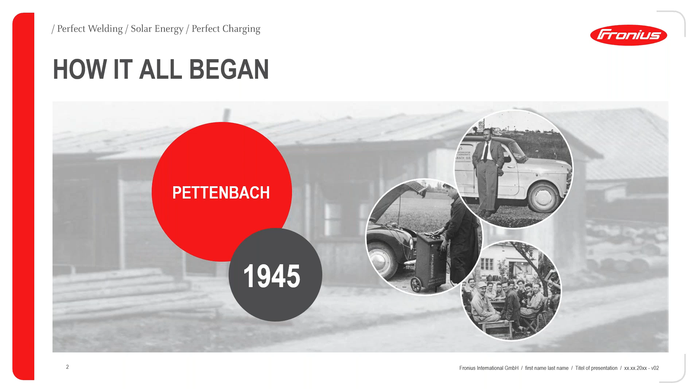As Matt said, we've been around since 1945. Fronius started in Austria. Speaking more locally, we've been in Canada since 2007, and the business unit Solar Energy was established in 2010 in Canada. We're Canadian, we're locally diversified because we've got both the welding and solar business units in Canada. We've got over 40 Canadian jobs and growing on a regular basis. So we're diversified locally, we're bankable locally, we're invested in the local economy, and we've been around to honor our warranties from within Canada since 2007.

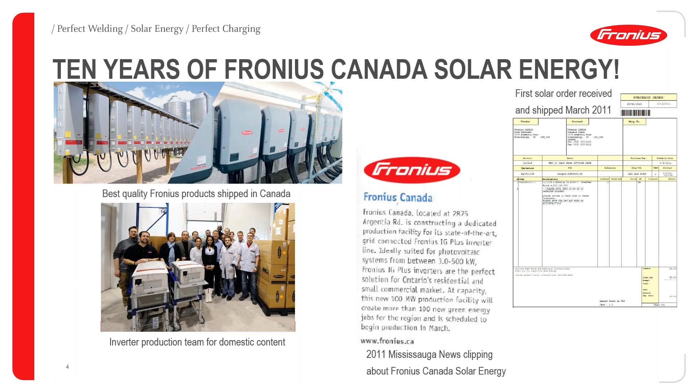Like I said, Fronius Canada's had solar around since 2011, so it's technically 11 years now, to be 12 years soon. And in that time, we had our production team locally here to do domestic content requirements for the FIT program in Ontario, and we've stayed here ever since, working on developing the business unit in Canada.

As was alluded to, our technical support is also located in Canada, so we understand the local climate that you are dealing with, the local challenges that you have with inspectors and all those kinds of things, and we're doing our best to support you from a Canadian perspective. Our tech support team is focused exclusively on Canada, so we're not distracted by US or European or any other technical calls. We're here to support your needs as you need us.

One thing that makes us really unique is that we're responsive on multiple platforms, so you can text us, you can call us, you can email us, and we will be responsive to the best of our ability. We will also check and respond to voicemails multiple times a day.

And the coolest thing is, if you've got a challenging issue that you want to get resolved right away, say your project location is 4+ hours away, or you've got a very important challenge that needs to be resolved, you can book appointments with our tech support team. So give them a heads up, let them know that you're going to be on site on this day at this time, and they will call you at the number that you specify at that time to make sure that you're getting what you need when you need it, when there's an urgent request.

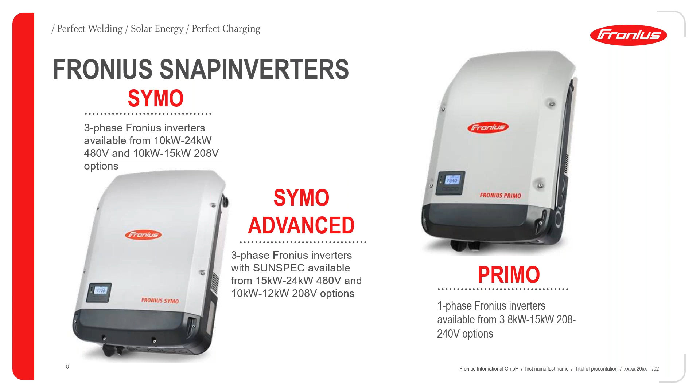And so it can be installed outdoors, 0 to 90 degrees, so it can be laid down flat or installed up vertically. And the great thing about this is it's rated out of the box to -40 degrees Celsius. So no matter how remote your projects are in Canada, the Fronius inverter is the best solution for you. It will work very well no matter what the external temperature.

And so as an example of that, we've got a number of projects in Yukon, Northwest Territories, and Nunavut. Some are even, I think, within the Arctic Circle or a few kilometers away from the Arctic Circle. And they give, in many times of the year, better PV production than projects in Southern Ontario or in other parts of the country.

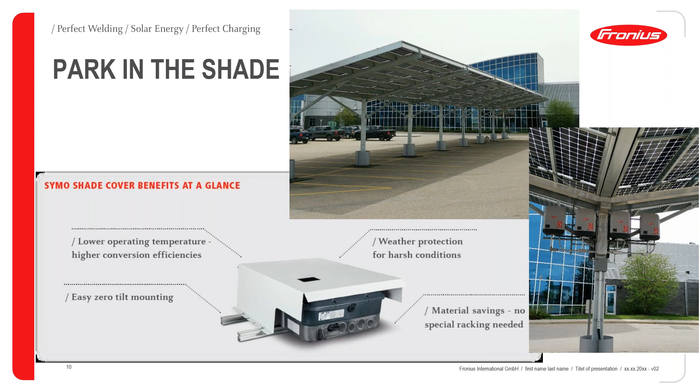Like I said, the inverters can be installed outside, but we always recommend parking it or installing it in the shade. And that's because it's power electronics, and the only thing that will live a longer, healthier life in the sun is basically water and trees. Nothing else likes to be in the sun. So the example I always give is if you can choose to park your car in the garage or in the driveway, what would be your choice? And the answer is always in the garage. And so that goes the same for any power electronics, whether it's an inverter or anything else.

One thing that comes up a lot with our inverters is how can we reduce yield losses caused by shading? And so we have just the answer for you. First, we'll go into basically max power point tracking. For those of you who don't know what that is, it's basically just tracking the production curve to maximize the output in kilowatts of the inverter.

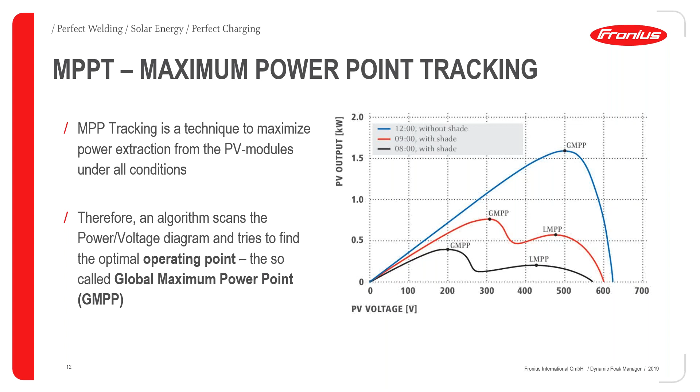But when you're looking at a local max power point tracker, which is what most inverters have, you can get caught on the local max power point and not actually track the global max power point when there's a shade going by or something. And so what the global max power point tracker does is it sweeps the entire production curve to find the global max power point to get the maximum PV output possible out of the array. And so we can enable this in our inverters with the Dynamic Peak Manager.

So you can see here as the shade goes by on the module, very slowly, the production goes down in kilowatts. And then the production will increase. So what it's basically doing is mitigating shading issues by providing more potential power coming out of the array. And so any issues that you have with shading are basically entirely removed with the enablement of the Dynamic Peak Manager. It's already inside all of the inverters that we sell, so there should be no issues with that. You just need to enable it.

Quick questions here. Sure, go ahead. One here from John. How long does the calculation take over LMPP? If you're talking about looking at the global max power point, I believe it sweeps the production curve every 3 minutes to ensure that it's on the max power point possible. Okay, and it says, I assume it takes more time to track the whole production values.

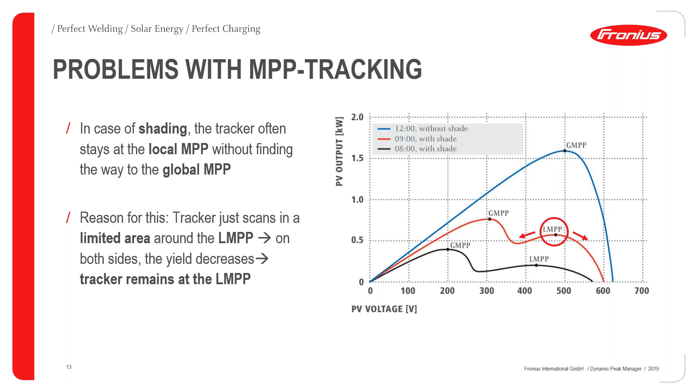I'm not sure I follow the context of the question, but... Sure, we'll follow up with you, John, after. Yeah, sure. I'm happy to have a conversation about that. Okay, thanks.

So another point is, even for an optimized panel, if there's shade sitting on it, then you're going to get the same production as if it was a string inverter. The only difference is once the shade starts to leave, that's when the optimizer starts to take effect. Because anyone with any experience in solar knows that shading doesn't actually kill an entire string. And that's because there are bypass diodes on the module, and the bypass diodes will cut out the strings that are underperforming. And so that work is actually done by the module itself through the bypass diodes, and no work is needed from an optimizer or an inverter.

The actual effect is after the shade sweeps through, so like a transient shadow like that chimney example, once the shade is gone, how does the system recover from the shaded scenario to make sure it's optimizing the production of the module? And that's what the dynamic peak manager is doing, looking at the potential production once every 3 minutes to make sure that it's got the maximum power production out of the module.

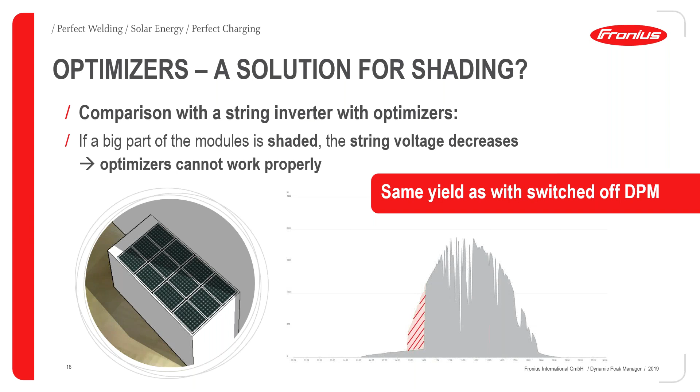Like I said, the temperature range for Canadian climates operates down to -40 out of the box. And it also operates up to 60 degrees Celsius on the high temperature side. And if any of you have been in Canada like me this past summer, we're getting mid 30s and high 30s on a more regular basis, unfortunately, and that trend is not going to slow down over the coming years.

So the reason we're able to perform in high temperature situations is because of the fans inside the inverter. The fans drive cooling within the inverter and radiate the heat and convect the heat through fins on the back of the inverter. And so you'll get the best cold temperature and hot temperature performance out of Fronius, where we will start to derate at much higher temperatures than any of our competitors.

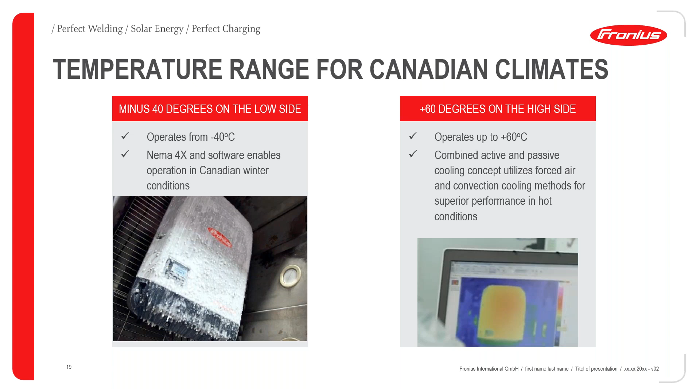And so in order to replace the inverter in case of a failure, all you need to do is throw the DC disconnect in the off position, loosen or remove 6 screws, pop the power stage off, pop the replacement power stage back on, 6 screws back in, DC disconnect in the on position, and the system's back online. So it is by far the fastest and easiest inverter to service and replace of any in the industry.

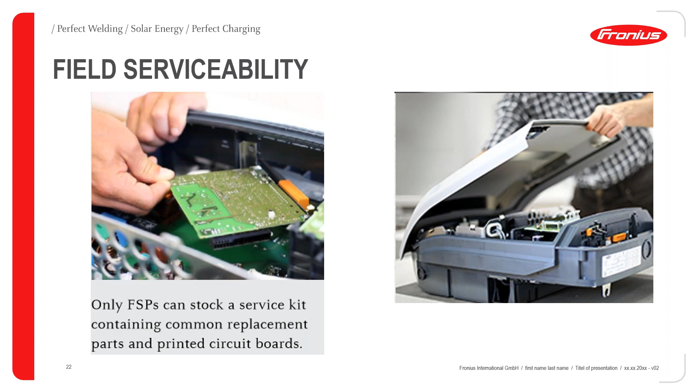The inverters are actually also field serviceable. All the boards on the inverter are connected mechanically. They're not soldered or permanently fastened. And so when people are called to do a service call, they can look at the components to see which have failed and then replace the boards, the PCBs in the field, which hold the failed component. So the service is even faster and easier than replacing the power stage.

The people who are able to do the field replacement of the boards are called FSPs, or Fronius Service Providers. They get 3 days of intense training where they basically break down the inverters to the bones and build them back up again, and walk through all the potential failure modes for the inverters. So they understand all the different failure cases, how they happen, and they learn how to identify them. And they also purchase spare parts kits.

So if they're called to the field to do service, they can identify the potential failure on the inverter, replace the board that's failed with one out of their spare parts kits, and get the inverter back online without a second truck roll, without getting a power stage to replace the existing one. So within one truck roll, they can do the entire service call and get the system back online right away.

We have a number of FSPs in Ontario. We have FSPs in Saskatchewan, in Manitoba, and in Alberta, with more being trained hopefully soon in Alberta, Saskatchewan, British Columbia, Quebec, and Nova Scotia. So the FSP program is going nationwide. We're hoping to get as many as makes sense to make sure that our portfolio of inverters is properly serviced and supported with properly trained partners.

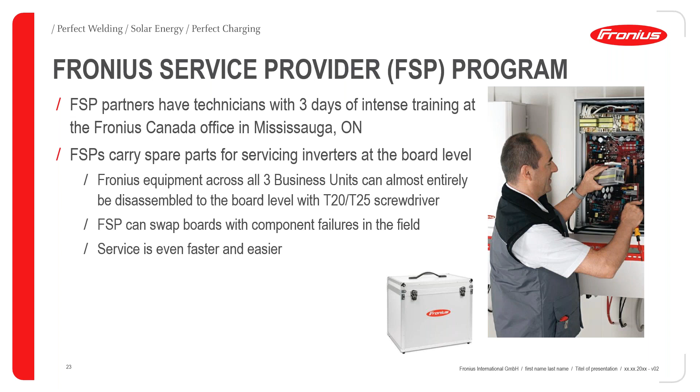We also have a rapid shutdown box, Duo and Quattro. This is especially relevant for single phase, primarily residential installations, where this will be low profile and can be mounted close to the array or under the modules.

And it can do 2 strings in, 1 string out for the Duo, and the Quattro can take 2 to 4 strings in and 2 outputs. So if you want to use the 2 max power point trackers on the inverter, you would go with the Quattro and either do 2 strings in, 2 strings out, or 4 strings in, 2 strings out. And this is for 600 volts shutdown.

The great thing about this product is it doubles as a combiner box. So it actually ends up being a net cost savings when using this product instead of getting a separate rapid shutdown solution and a separate combiner box.

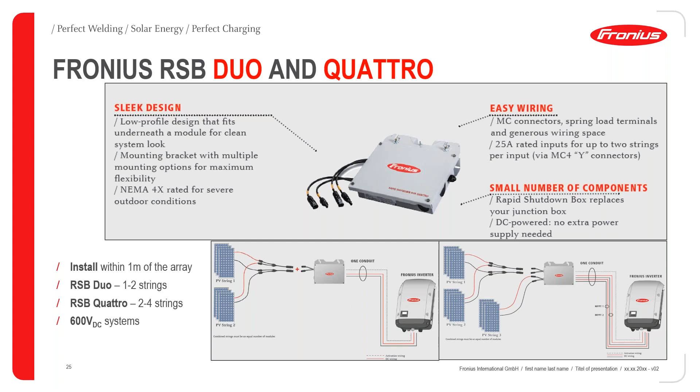We have 3 free monitoring platforms. We have Fronius SolarWeb, which we'll review at the end of this presentation, Fronius Solar TV, and the SolarWeb app. So Solar TV would be an example if you've got a high-profile customer, like a large retail customer, someone who wants to have a lobby display showing the production and performance of their array. With a smart TV, they can connect to solar.tv and connect it that way. And the SolarWeb app is basically a representation of SolarWeb, but for a smart device.

Fronius Monitoring. So monitoring is enabled via the Data Manager 2.0, which enables monitoring via LAN, wireless LAN, and Modbus options. It's a very simple communication setup using your laptop or smart device. And this enables all communication. One data manager is required per site. So if you've got one inverter or 100 inverters, you will only need one, up to a maximum of 100.

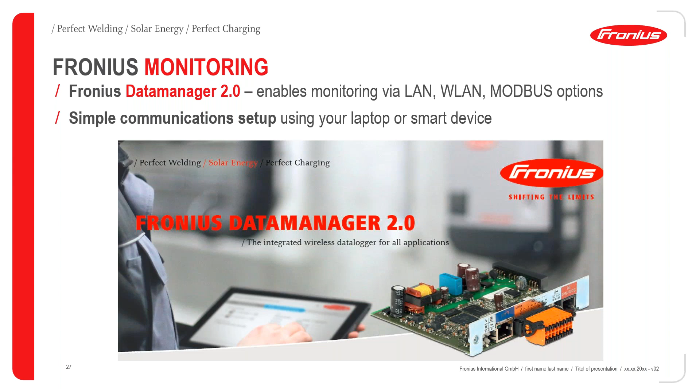Fronius Inverter Registration. This is a very important topic. So for anyone who's buying a Fronius inverter, we want to make sure you're getting the full 10-year warranty. And so when you register the inverter, the warranty starts from the date of installation, not the date of sale. For example, if BayWa buys a bunch of Fronius inverters and some of the last ones maybe sell 4, 5, 6 months from the date that they purchased the inverter, then by the time you get it installed on your site, it could be another couple of months, maybe even up to a year. So that's automatically 6 months to 1 year of the warranty which has been lost.

So when you register the inverter, what you're actually doing is informing us of the date of installation of the inverter with the registration process. And once the inverter is registered properly, then the warranty start date will be reset to the date of installation based on the registration. So that allows us to ensure you're getting the full 10-year warranty from the date of installation for the inverters that you install.

All the warranty information can be found on SolarWeb. You can print warranty certificates on there as well and look at the warranty status to make sure that it's been processed properly. It clarifies all ownership information when the inverter is registered, and it simplifies technical support because we can automatically identify the serial number of the inverter if it's been registered on the site.

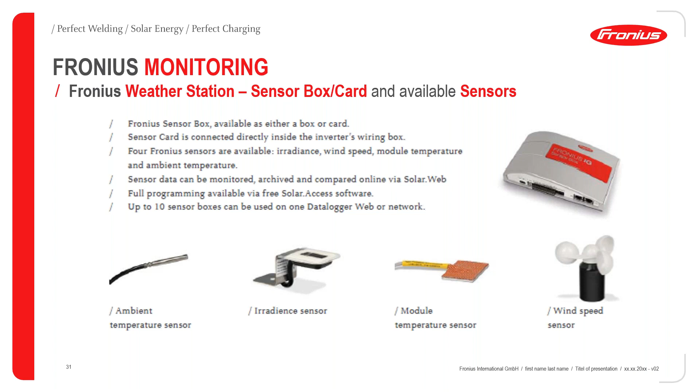We have monitoring options as well for a full weather station. So we have sensors for ambient temperature, irradiance, module temperature, and wind speed to allow you to get weather station data on your installation site.

We also have consumption monitoring via our smart meter. So the smart meter allows us to visualize the consumption and production of your system. And we'll go through the details of that when we look at SolarWeb. But all is to say, it's a small cost to add the smart meter, and it allows you to visualize the entire energy flow. So all the power that's being generated from the PV array, all the power that's being consumed at the home, all the power that's being pulled from the grid. So you can have a full energy flow diagram and really understand your energy as it's moving on your property, or your customer's property.

And so the real value in that, say for example, on a net metering system, you can double check to make sure that your numbers for generation and consumption match the numbers from the utility company, and make sure that you can really understand how the system is performing.

There's also the possibility for feed-in regulation and dynamic power reduction. So if there's a site with, for example, limited export or zero export, that can be managed through these. Those are usually more in-depth conversations with utility companies, but those are systems that we have installed in a number of systems across the country.

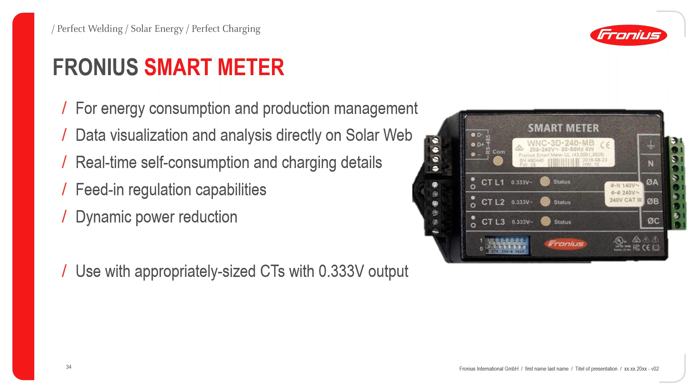We also have regular training, usually 2 per month. We have many that are pre-recorded webinars as well, and some that we can do on demand. The most common topics include installation, like best practices for installation, product training, commissioning, setting up communications, etc.

For anyone who's looking at potential retrofits, most commonly happening in Ontario right now, but there's a lot also happening outside of Ontario. A lot of warranties are expiring on manufacturers who are no longer in Canada or in the market. So we can help with some string design or system design in consideration of the inverter to make sure that if you're just replacing the inverters, you can replace with Fronius, and we'll make sure that the system makes sense and that you'll get the best performance and production out of it.

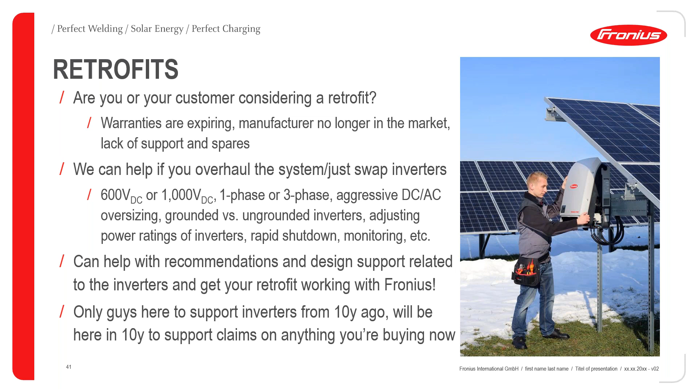We can help with recommendations and design support as well. We're here to support for any of your needs, retrofit or otherwise. We've also got the Solar Online Support tool. So what happens now, say for example, you're monitoring your system and you get an error code. You would look at the error code and then go to the inverter and say, okay, what do I do? I don't know. You've got to look in the manual for the error code and see what the process is. What you'll probably do is call tech support, and tech support will give you a step-by-step problem resolution process.

With the SOS tool, what you can do is put in the specifics of the inverter. So you put in the inverter itself and the serial number, and you would follow the same step-by-step process that you would get if calling tech support. So you don't have to wait. Maybe if tech support's not available or you're waiting for them to call you back, you can just open the SOS tool and go through the process.

The really great thing about this is if you can't resolve the issue with the SOS tool and you do need to still call tech support, the SOS tool automatically creates a case for us in our system and shows us the steps that you've already completed. And so there'll be a lot of time saved because we know exactly what you've done already. And so we won't ask you to go through those same steps, and we can shorten the process substantially and get you more effective time with our tech support team.

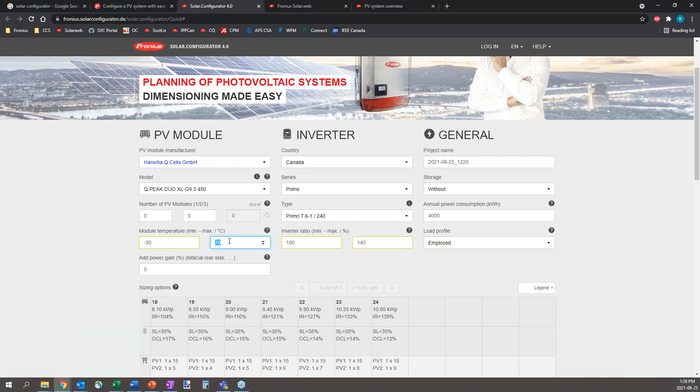And the module temperature minimum and maximum, I put -30, and then on the high side 70 degrees, because this is the module temperature, not ambient. And inverter ratio here, I put anywhere between 100 and 140, so that's the oversizing ratio. And then down here, you can see in this chart, it shows all of the different module counts. So say for example, let's choose 20 modules. That gives us a DC power of 9 kilowatts peak with an inverter oversizing ratio of 116%.

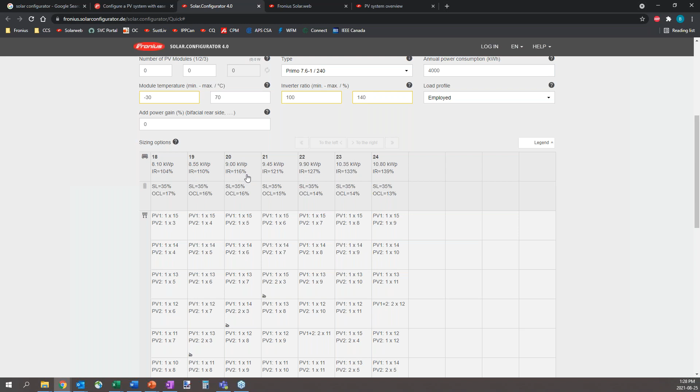So in this case, we can look at all of the different string configurations to get us to 20 modules. So if you know you can fit 20 modules on your customer's roof, then this is the column for you. If you can only fit 18 modules, this is the column for you. If you can't fit 18, well, you need to pick a different inverter.

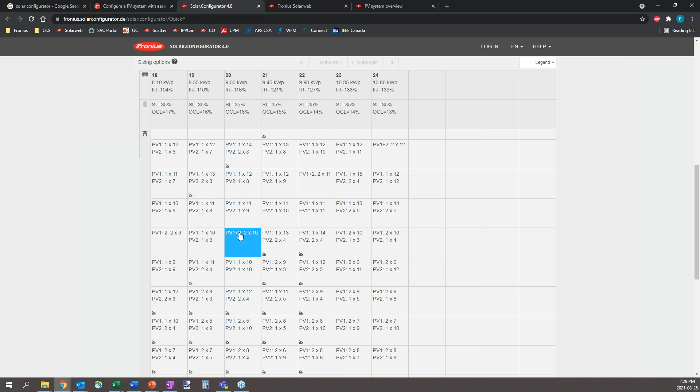And so if you want to fit, let's say 20, it's a nice round number. So your options are you could do one string of 15 and one string of 5, or a 14 and a 6. Or if you want symmetrical strings, you could do 2 strings of 10. So you have all the different options available here to you. So let's assume we have a smaller roof section and a larger roof section, so we'll do a string of 14 and a string of 6.

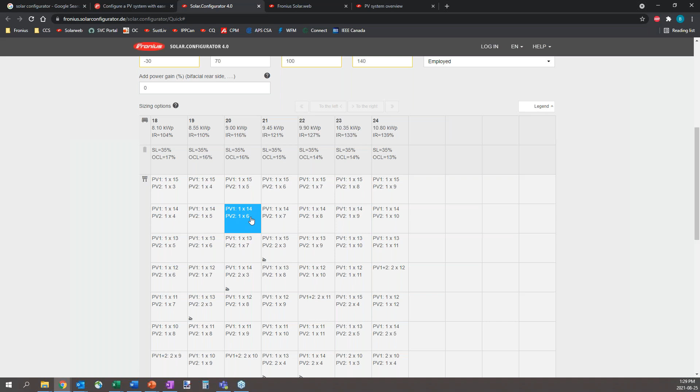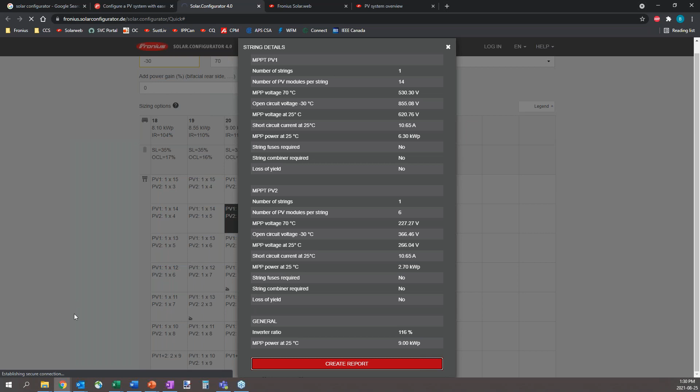So you can see here, if you click on that square, it'll take us to the summary showing the string details. So the per MPPT production voltage, current, everything is on that with the module specs in consideration. And then if you click on create report here at the bottom, it'll automatically generate a PDF report for you with all of the string details, including the module specs.

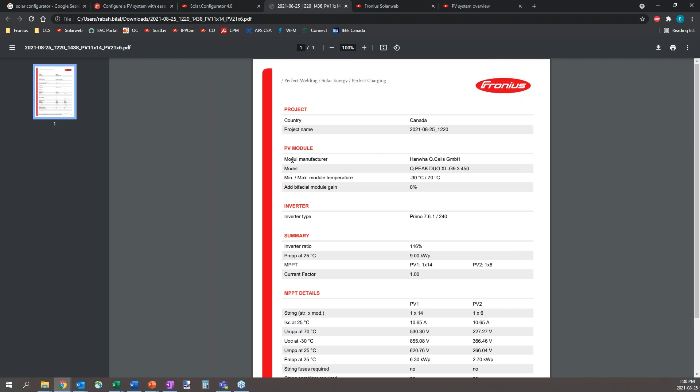So you can see here, you set the project name if you'd like, and it shows you the module model number and all those details, and then the summary here, and then the performance for each MPPT. So that took a total of 5 minutes, and I took my time explaining it. It's usually a lot faster than that, especially if you use the tool once or twice before. You get the hang of it, and you can do a string design in less than a minute, typically.

So that, I would say, is the first myth dispelled. Designing a PV system with a Fronius inverter is very easy and straightforward, and you even get a report to add to your files. Myth number 2: string inverters produce less kilowatt hours than module level power electronics like microinverters or optimizers. If you've got the microinverters or the optimizers, they're looking at individual module performance, and so you get better.

Okay, so there's a whole bunch of data, and you can just go on Google and look at a whole bunch more data, but ultimately, this is just not true. The only time that a Fronius inverter will be outperformed by optimizers or microinverters is when the array is covered by snow. So that'll be January and February, where you're getting the least yield anyway. Otherwise, typically the production on the PV array is matched or exceeded by Fronius, and the total kilowatt hours generated in a year will be greater with a Fronius inverter than with microinverters or optimizers.

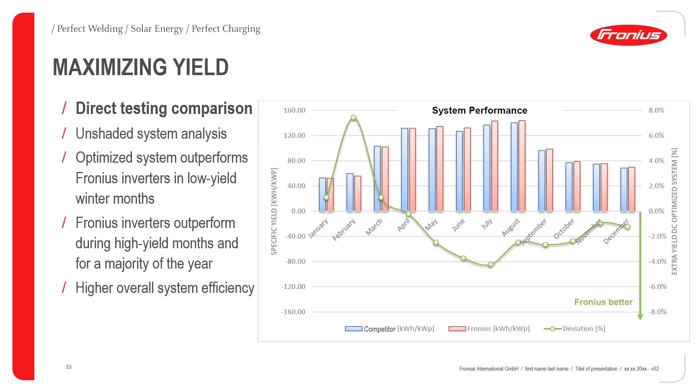Module level power electronics are safer. That's the next myth. And so one thing I always like to point out is that if you look at global numbers for failures on PV systems, or for fires on PV systems, number 1 and number 2, usually equally relevant, are power electronics and inverters, and connectors and terminals and junction boxes. So anywhere where there's connections. Those are the two that usually add up to about 50% of the cause of fires globally on PV systems: connectors, terminals, junction boxes, and power electronics.

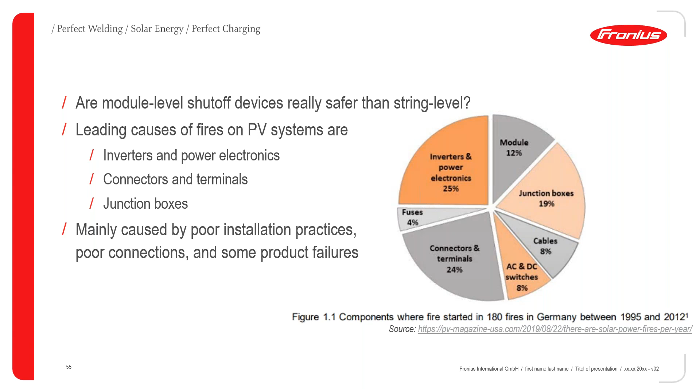And so you can automatically understand that if you've got optimizers or microinverters on the roof, you're increasing the quantity of power electronics by a wide margin. If you've got 1 optimizer per module or 1 microinverter for every 2 modules, for 20 modules, that's 10 to 20 additional components on the roof. Also, with module level power electronics, the number of connection points is at a minimum typically doubled, if not tripled, compared to a string inverter solution. So by trying to make the system safer, you're actually increasing the 2 leading factors of fires and failures on a PV system with the number of power electronics and the number of connections on the array.

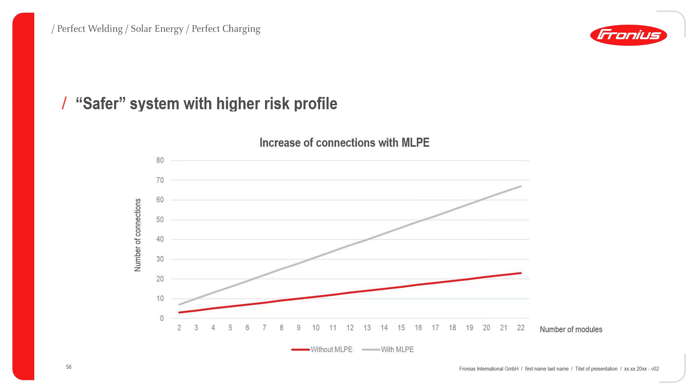One other myth that people believe is that they need module level monitoring to make sure the modules aren't failing and that they're working properly. And so again, anyone who's been in the industry longer than, I'd say, a year or 2 should know that modules are probably the last component to fail on a PV array. Maybe the racking lasts a bit longer, but the modules last forever. There's modules installed in the country since the 70s that are still outputting power. Maybe not 100% or 80%, but they're still in working condition.

If there are issues with the PV modules, and they're few and far between, usually they'll appear within the first months of installation, and they'll be irrelevant from there. So when you're putting a power electronic device to monitor the module, what you're actually doing is putting a device which is going to monitor itself. Because over the 20-year life of the system, any power electronics, whether string inverters, microinverters or optimizers, will fail at some point. And so you'll see probably at least 1 to 3 failures on the device itself before you would ever see any failure on a module. If there are failures, there's very easy processes to identify which string and then do a rule of halves to identify which modules are affected on the string.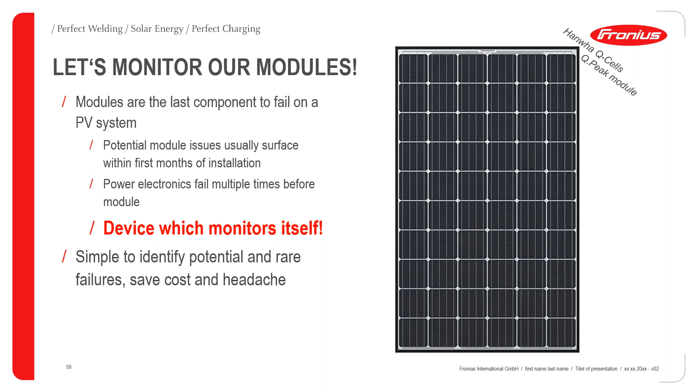So finally, how much does this really cost? Upfront, we know that microinverters and optimizer solutions are more expensive than string inverters. That's not in question. So the real question is, what about the long-term cost of ownership? If you're adding all of these components, you're adding all these points of failure.

And all things being equal, I never like to say anything bad about my competitors. They make great products. Assuming their failure rates are the exact same as Fronius's failure rates, they will eventually fail. All power electronics fail. An inverter or a microinverter or an optimizer is the same as your TV or your laptop or your cell phone. They will fail at some point. That's just the function of them. So whether you're buying a Fronius or anyone else, you probably will see a failure over the 20 years.

Now, that being said, we have a large number of inverters that have been operating in Canada for 10 plus years, even some that were purchased before Fronius Canada existed, that have not had a single failure. So whether it's 5, 10, or 20 years from the install, no power electronics will last forever.

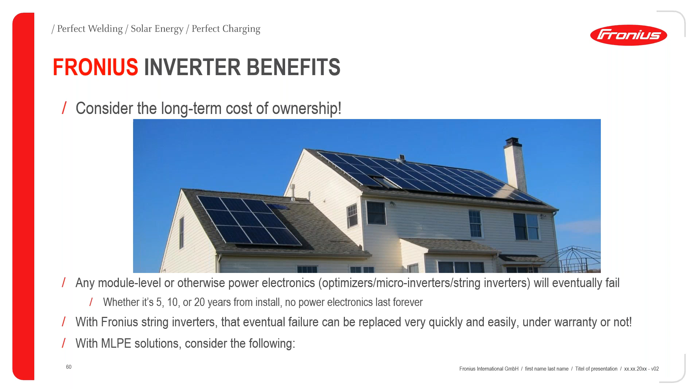That's the fundamental. So with Fronius string inverters, that eventual failure can be replaced very quickly and easily, whether it's under warranty or not. You can swap the power stage and get a new power stage to replace it, or get the components replaced by an FSP. And so these are the examples that I like to give if you've got microinverters or optimizers. If one unit goes down, your customer gets on the phone with you kicking and screaming, this inverter or this module is not producing, please get out here and fix it.

If I was sitting with you in the same room, I would ask you, how much do you think this service call would cost? Because I like to know from your experience. The answer typically is around $250 to $300, because you've got to get up on the roof with a ladder, remove 2 modules to replace that failed component and get the modules back on. Time consuming, you charge the customer, then you go on.

Whatever period of time later, this module fails. Well, now you can access it easier, but you still have to get up on the roof to get that failed point. And your customer is kicking and screaming, and you're saying, should I wait till more fail, or should I get out there and appease my customer? Eventually you get out there, another, let's say $200 to $250 for this truck roll that your customer is going to be paying for.

Pardon me, I'm just going to drink some water.

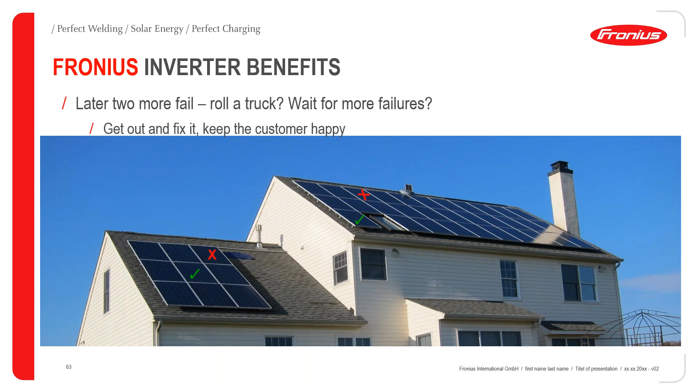Okay, so then these two fail. So now you've got 2 different roof surfaces. They're both relatively easy to access, but still it's a lot more time. You've got to get up on 2 separate roofs. So let's say this is $350 to $400. But your customer wants you to get out. You want to wait for more, but your customer doesn't want to wait. So that's more cost and pain for you and your customer. Then at one point this happens, because they don't all fail at the same time, unfortunately. They can pick and choose when they'd like to fail.

So think about, if a customer called you with this failure mode and asked you to come do a service call to replace them, how much would this actually cost? I usually get estimates around $1,000 to $1,200 on the conservative side, probably $900 to $1,200 cost to your customer. I know there are some free replacements and maybe a little bit of service reimbursement from my competitors, but I don't think it's enough to cover how much this is going to cost. Your customer is not going to be happy with the cost of this.

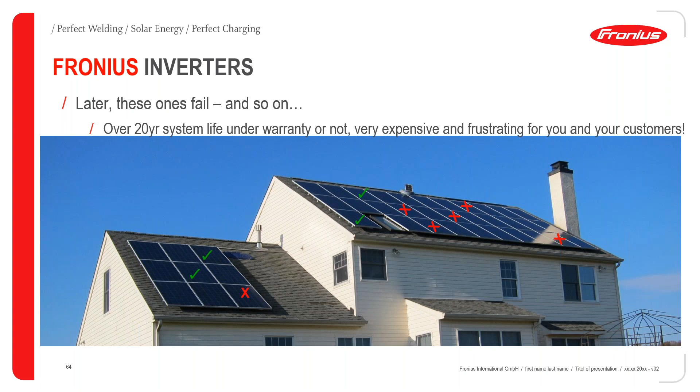And this is how unpredictable it is, right? You don't know if and when they'll fail, and if they do fail, how nice they'll be to you. So again, assuming Fronius fails in the exact same failure rate, maybe you get 1 or 2 failures over the 20-year life of the system. You walk up to the inverter on the side of the house or in the garage. You turn the DC disconnect, pop out 6 screws, replace the power stage with the new one, put the 6 screws back on, DC disconnect in the on position.

That's $150 to $200 service call for your customer, once, maybe twice over the 20-year life of the system. Then you have a better reputation or relationship with your customer. You get word of mouth references from them for their neighbors and friends who want to do solar, and you have a better general reputation with that.

So if you consider the long-term cost of ownership, lower cost for O&M, lower cost upfront, local tech support in Canada, the SOS tool, the Fronius service providers across the country, install, service, warranty claims are all streamlined and all simplified and all honored through your Canadian Fronius partner. The warranty product is not coming from the US or from Europe or from China or from Mexico. It's inventoried here in Canada to support your needs.

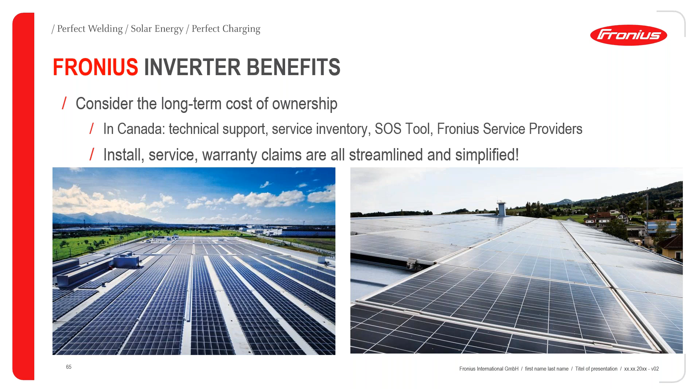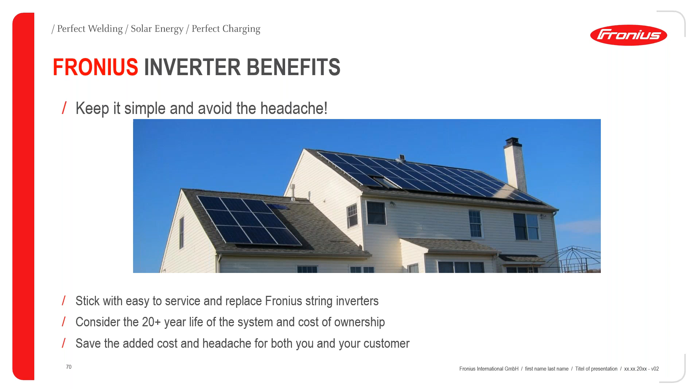So swap the inverter quickly and easily. You've got all of these great benefits with Fronius. Keep it simple and avoid the headaches. Stick with the easy to replace inverters and keep yourself happy, keep your business happy, keep your customers happy.

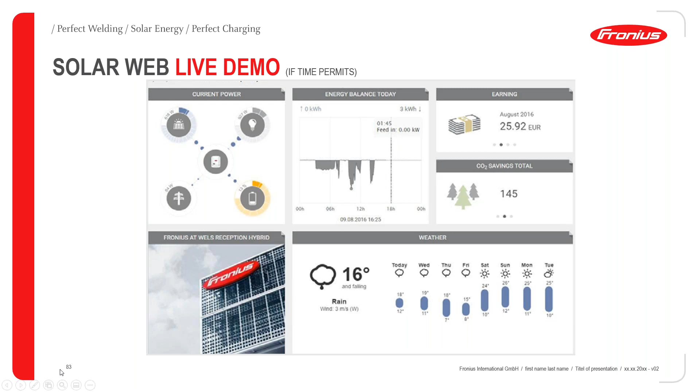So I'll jump to the SolarWeb live demo now. And then that's pretty much it. So I'm definitely open to any questions that you've got at this point while we look at SolarWeb. And so SolarWeb is the monitoring platform for Fronius, and it's free. And so if you'd like to show it to your customers to help them understand the capabilities, you can go to solarweb.com like this, and then click on View Demo.

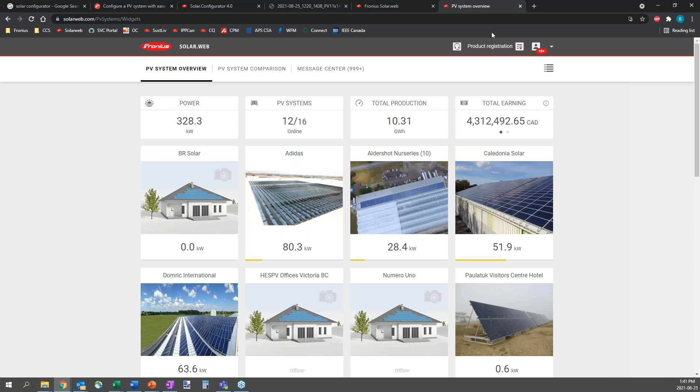Oh, I think because I'm logged in, it won't let me. But there's a number of demo sites on SolarWeb where you can look at what the system looks like. If you look at the Madrid site in particular in Spain, it'll show you what we're going to look at. So I like to show two examples. The first example I'll show is Caledonia Solar.

So this is SolarWeb with a Fronius inverter and a data manager. So here you've got the current power. You can see here is basically 52 kilowatts, which is 52% utilization. Obviously, that means that this is a 100 kilowatt system. Energy balance today, we've gotten 141 kilowatt hours off of this system. I want you also to pay attention to this current power diagram. Basically it just shows the inverter, it shows the percent utilization, and of course the dark yellow area is the percentage and kilowatts being produced at the moment.

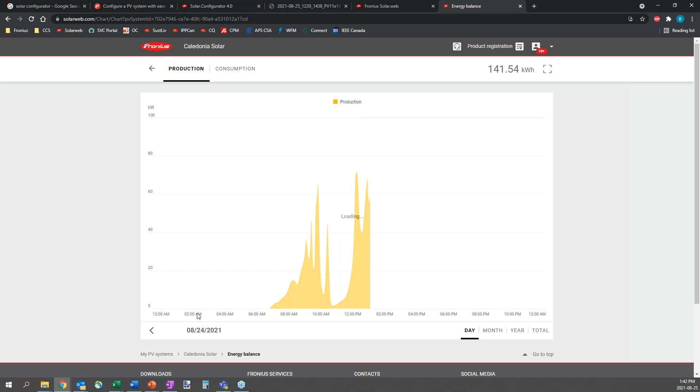So if we look at energy balance today and click on the words at the top, we can look at historic data. So we can see here, this is the PV production for the day. We can go back to yesterday to see what it was like. And obviously that was a beautiful production day for Caledonia Solar.

Started right in the morning. Apparently it's oversized nicely, so you're going to get nice early production of PV, and then you're going to cap out at around 11:30, and it's going to be max production until somewhere around 4 o'clock, and then it starts to ramp down as the sun goes down, and then the production is done. That's a great example of a simple SolarWeb site with the data manager and the inverter registered on there. And you can see here for yesterday, 858 kilowatt hours were produced.

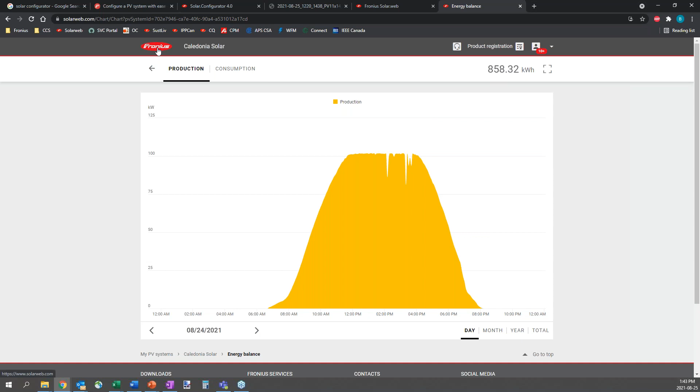Now, if we go back to the main page on SolarWeb, let's look at another site here called Johnson Solar in Manitoba. So now you can see here under current power, we're no longer seeing just the PV inverter. Now we're seeing the entire energy flow diagram. And that's because Johnson Solar has a smart meter installed.

And what the smart meter is doing is feeding the data manager all of the consumption data off of the main service panel. So the smart meter is connected with CTs to the main service panel and measures the current coming off of the main service line into your service panel on the residential installation or commercial installation. It works for commercial systems as well. And so now you can look at the net data between the PV generation and the energy consumption of the property to understand all of the energy as it's flowing to and from the property.

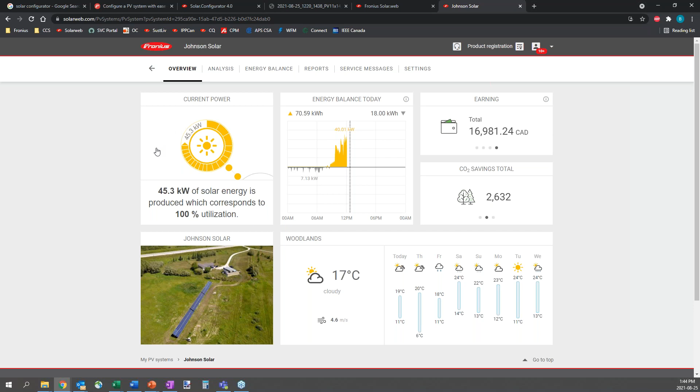So here in this case, this customer has a very aggressive net metering contract, and so he has a very oversized system. So it is a 45 kilowatt system, which is three 15 kilowatt inverters on these three sections of the array. And so 45 kilowatts is currently being produced. It's a very sunny day at the moment in Manitoba, and so he's getting 100% generation of the array.

The system is 100% self-sufficient because it is being serviced completely by the PV generation at the moment. The property is currently consuming 6.52 kilowatts, which is supplied entirely by your PV production. And so the net, which is 38.8 kilowatts, is currently being fed back to the grid, where he's being paid on his net metering contract.

So if you look here now, you can see the chart is even different because now you have a gray area below the zero line, which is showing the consumption. So this chart is now a net chart of generation and consumption, as opposed to just showing you the simple generation off of the array.

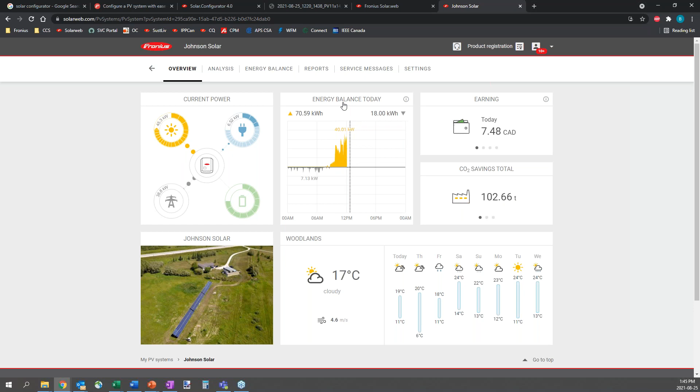So now if we click on energy balance today, we get a lot more detailed information. We can see the gray area up here is the total PV production at the top and the power that's being fed to the grid. The blue line is the consumption, and the yellow area is the consumption which is being serviced by the generation from the PV array. Again, we can look back to previous days and whatever period since the registration of the system.

So that was a tumultuous day. Let's try to find a nice sunny day. Oh, that's a good one too. You can see all the varied production here. Looks like it was a bit of a cloudy day, so the max PV generation was somewhere around 18 kilowatts, 18 or 19. So what we can actually do is, and this is enabled by SolarWeb Premium,

and so I'll jump in to say this really quickly. For anyone who's registering for SolarWeb, for you or for your customers, make sure to quote unquote buy SolarWeb Premium. It is a very expensive cost of $0, but you do have to click on buy and then confirm the purchase at $0. It's free, and it allows you to look at historical data since the installation of the PV system. So here, for example, we can look at

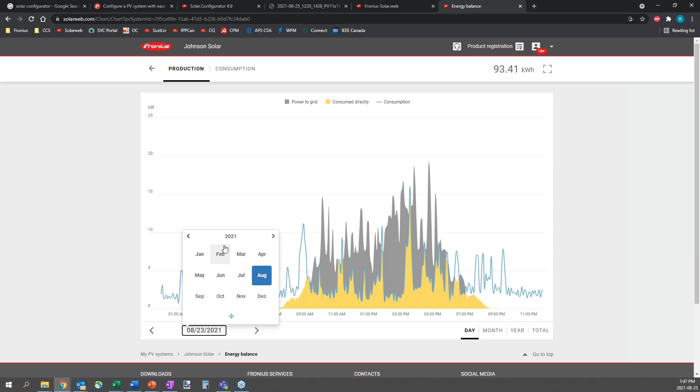2020. We'll go to August a year ago, August 25th. So you can see here it says premium. So when you buy premium for $0, then you get access to the historical information all the way back to the installation of the array. And so we can look a year ago on August 25th, it was also a bit of a cloudy day, but still good PV production.

Bilal, John is asking, will it always be free? For the time being, yes. I'll tell you, I joined Fronius 4.5 years ago, and at the time I had been given indication that at some point SolarWeb Premium will not be free, and they don't have a date for that yet. And so that's still the information that I get now 4.5 years later. So for the foreseeable future, yes, it will be free.

And if there is a cost, I expect it should be somewhere around $3 or $4 a month. And that's a liberal estimate. If it's not free, again, you have access to all this data, just not all the historical data. But if it does become a cost, again, it won't be this year or next year. And so at the very least through the end of 2022, there will not be a cost for SolarWeb Premium.